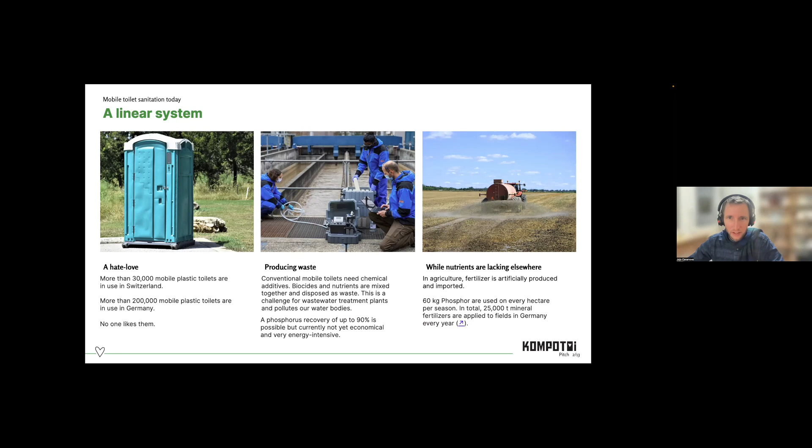The beginning was actually quite hard, I would say we did probably 100,000 failures, as a lot of startups do. We literally took the wood out of a big bin, put together the first cabin, and then we tried it out at the first event. Luckily, the people were too shy to say that's not a good idea.

So they said we should progress. So we did. Next year we did 3 more prototypes, and the next year 10, and then 30, and then 50, and then 100, and then 400. And we run around 1,000 units right now in Switzerland.

What we really recognized quite in the beginning is that what we do is actually a lot, next to building wooden small houses, it is a lot of transportation and service. Switzerland is small, but the word was spread quite fast. So we got calls from 2 or 3 hours away from our headquarters, where people were asking, hey, we would like to rent one of your beautiful toilets, or 2 or 3 or whatever. And it was a huge effort to drive so far.

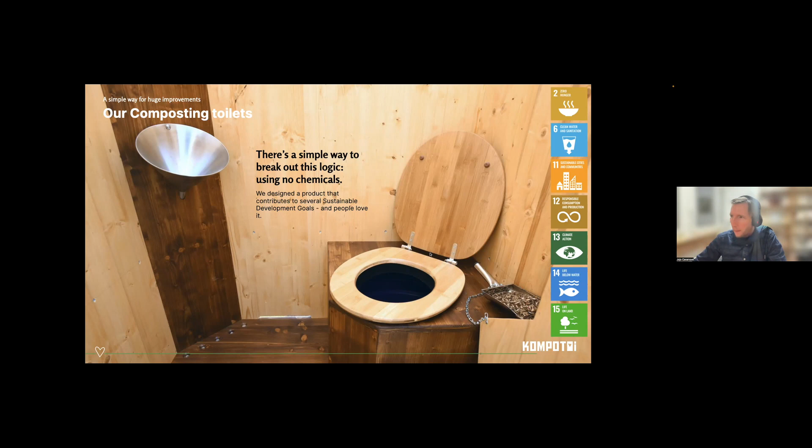And we also have a bit different targeting group than the plastic chemical industry. So what I know, the plastic chemical toilets were invented because construction sites mostly need some solution for the workers. And of course, everyone knows mobile toilets are also used for events and in public and touristic areas.

But we really set the focus on this area so that we don't fight too much with the other companies, and we even want to work together with them because we think we can help them have something new in their portfolio. It's better to work together than against each other.

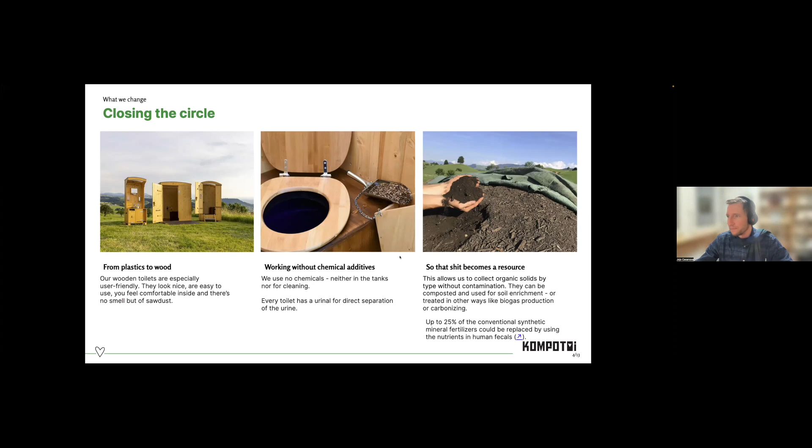So I have here some pictures from our use cases. Of course, we do a lot of events, mostly not huge ones, mostly very small ones. We just got the biggest reservation for next year - it's about 90 toilets, so it's not a big event, but at least for composting toilets, it's quite good to have events like this. But we have much more, like every weekend we have some with 5 toilets there, 2 toilets there, 3 toilets there, and 1 there, and so on.

And for example, the biggest customer from us is the city of Zurich. They have a lot of public places. And in summertime, they are used a lot more than in wintertime. In wintertime, if you have children, of course you go to the playground, but after 10 minutes you're freezing, so you need to go home. You don't need a toilet.

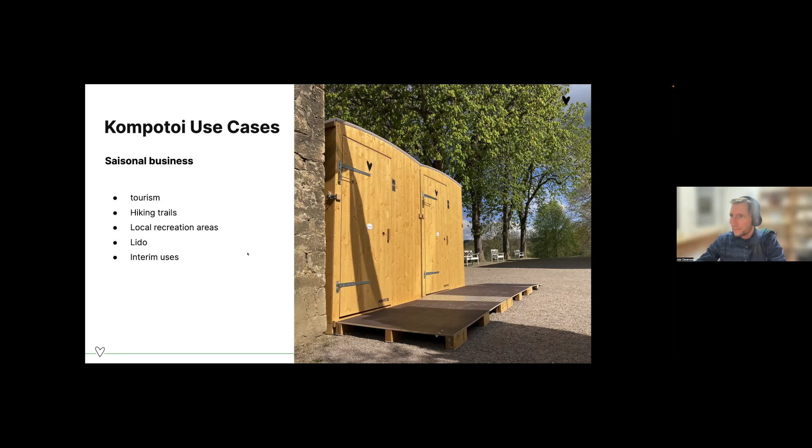So exactly, this is another use case you see here in a public playground.

Of course, we have looked also on the market, and it's really interesting. I mean, even in the small country of Switzerland with 7 million inhabitants, we have 30,000 mobile toilets. And I guess we have a potential of up to 20% of the composting toilets. And if we look at the worldwide market, there is a huge demand for mobile toilets. It has been growing the last 10 years already.

So it's a very interesting market, and we really want to change how this market is looking at the material right now. It should not be trash. It should be looked at as a resource.

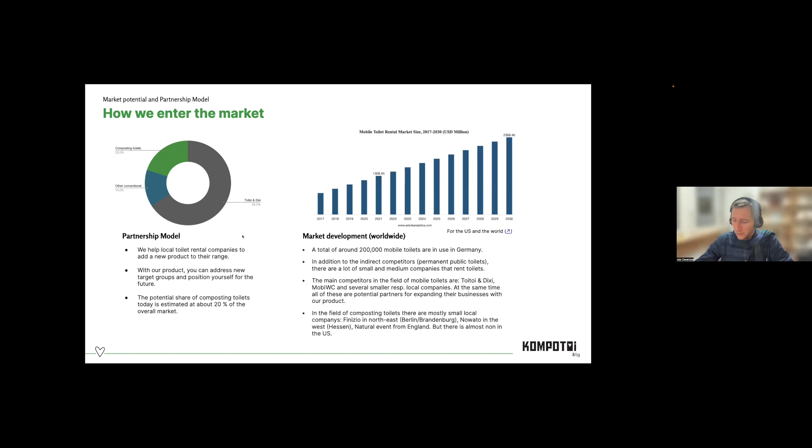Of course, that's not super simple to do. We also have issues with the regulation here in Switzerland. We're, I would say, very happy it's not so strict as it is in the rest of the EU. As I told probably 7 times, Switzerland is very small, so we actually have quite a good relationship with the government, and they also see the necessity, because they have their agenda for 2030 - they should be more circular and so on. So they're really willing to look at it. They don't have so much resources to look at, but we are very happy.

We also founded an association 2.5 years ago, where we did more research and really, how do you say, political work, and that progresses very well. So we have really good tests that show our compost is in a very good condition and safe.

That's very important for them, that we can prove that. I think we've now reached a level where we really can prove that. The same is true in Germany, where there's another association working on the same field, so we can work together, which helps a lot.

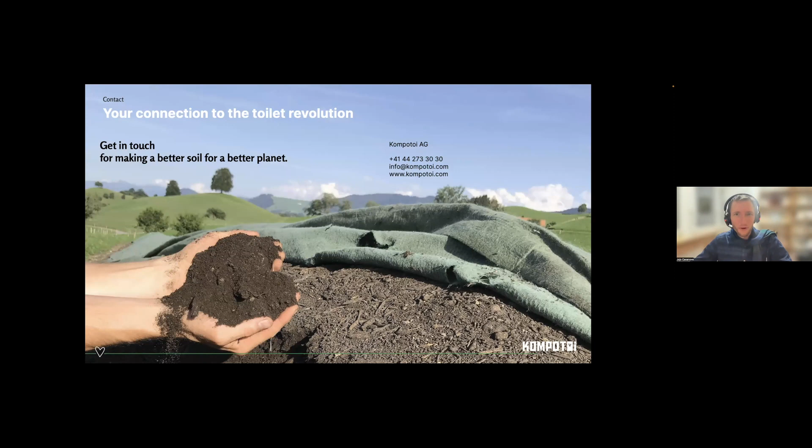So if you're interested to run a porta potty rental company, or know someone who could be interested in it, get in touch with us. Thank you very much, and I'm open for questions later.

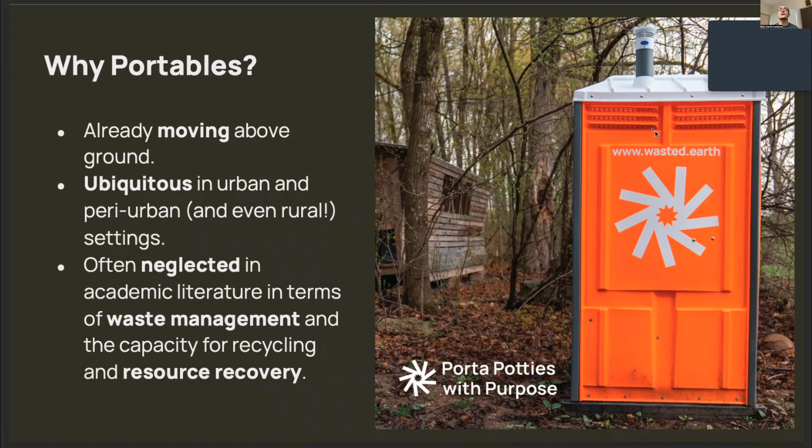That's an opportunity. To explain how it works for us at Wasted, we don't have composting toilets. They're more traditional wet porta potties, where the mixed waste tank is charged with water and an additive to obscure waste and hide smell. About 30% of our fleet has urine diversion as a pilot.

The urine is diverted through a standing urinal into a bladder that's held within the mixed waste tank, so it's out of sight. I'll just note that porta potties are often neglected in academic literature in terms of the potential for resource recovery, and even as basic as general characterization.

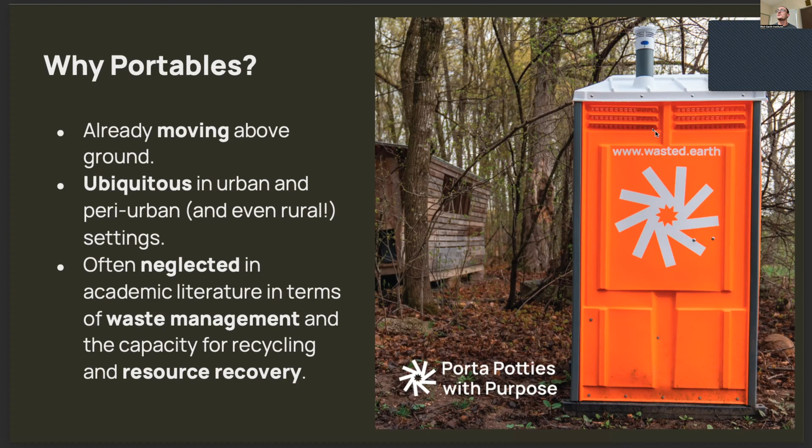So here's one of our toilets on site.

We must know the characteristics of waste to design any sort of treatment and resource recovery. For biological treatment, you need to know the biochemical oxygen demand. We found only one paper that partially describes the characteristics of portable toilet waste, but it lacked information regarding nutrient or elemental concentrations. Some characteristics of interest are measurements of solids, chemical and biochemical oxygen demand, which measure organic material, and then nitrogen, phosphorus, and other elements and nutrients.

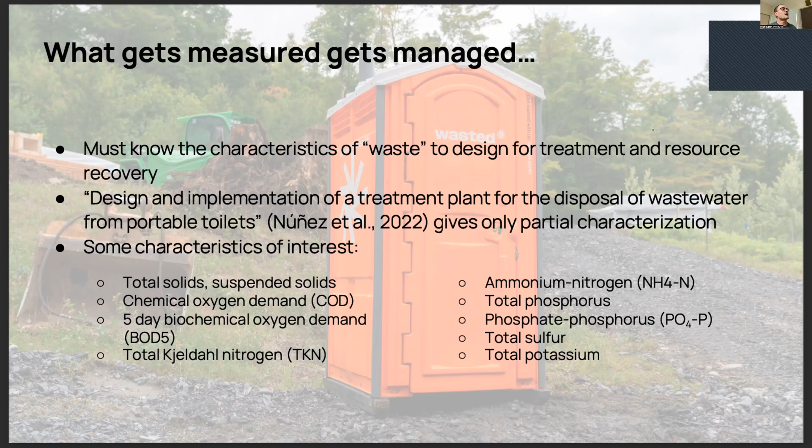Some more toilets on site. Our first approach for characterization was from the ground up, based on existing literature data of the composition of poop and pee and our estimated fill rates of portable toilets.

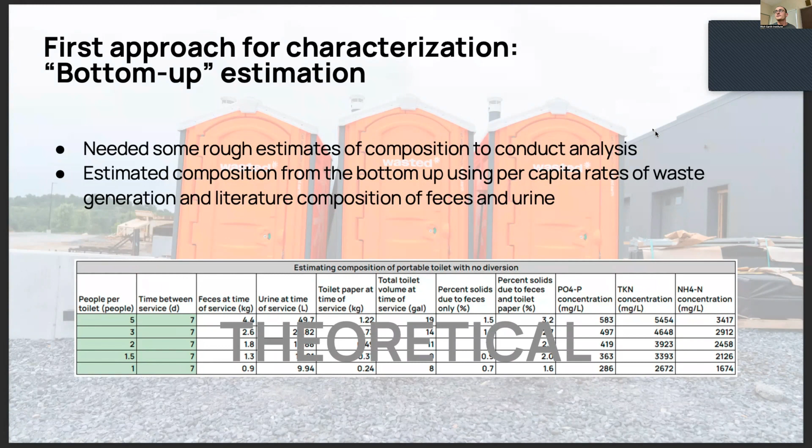This was essentially a spreadsheet exercise, not real lab work. We knew that people produce poop and pee at particular rates, and a toilet fills to about 10 gallons, so we could do a mass balance to get some rough ideas of what is in a portable toilet, because we really had no idea at the start. This was, although pretty rough, a very useful exercise, and I'll describe a bit more why later.

So here I am pouring out homogenized portable toilet waste, which is a polite way of saying blended porta potty smoothies. I'm very glad to be done with that for a while anyway.

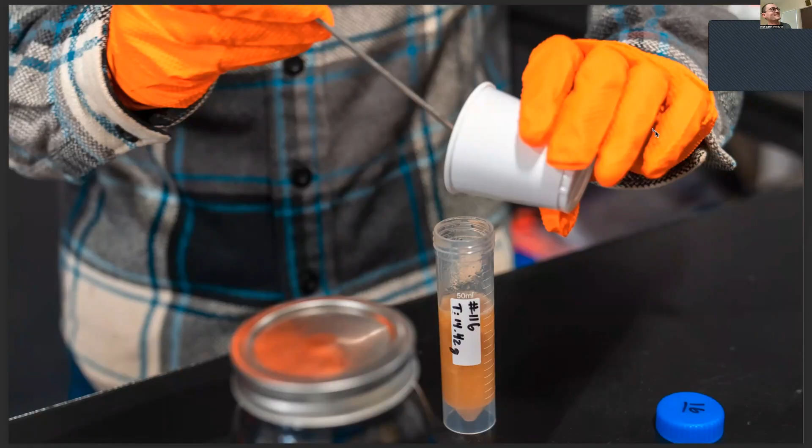Our second approach for characterization was actual physical measurements of portable toilets by different use cases. We needed real data to design treatment for our waste and to meet the unmet analysis that we just couldn't find. So we physically sampled and analyzed toilet data from three different use cases.

Those were long-term urine diverting toilets that were used throughout the workday, similarly long-term toilets without urine diversion, and short-term event toilets for things like concerts and parties, again without diversion.

For each use case, we built a composite of 5 different toilet samples, stirring the tank to mix the waste as best we could, sampling, pooling, and homogenizing. We sampled much more material than we needed because we did not know if we could get the analysis right the first time around. We also conducted sampling in triplicate because we expected sampling to be a non-trivial aspect of this analysis. Porta potties have a range of textures and consistencies — there's liquids and solids — so we wanted to make sure we were consistent and representative in how we made these measurements.

Here we have our pump truck, one of our pump trucks, on the right. You can't tell from the outside, but the tank is split into 3 parts: one for source separated urine, one part for mixed waste, and one part for processed water. That pickup ahead of us is a farm partner's urine applicator with some tubing low to the ground to reduce losses there and prevent burning leaves.

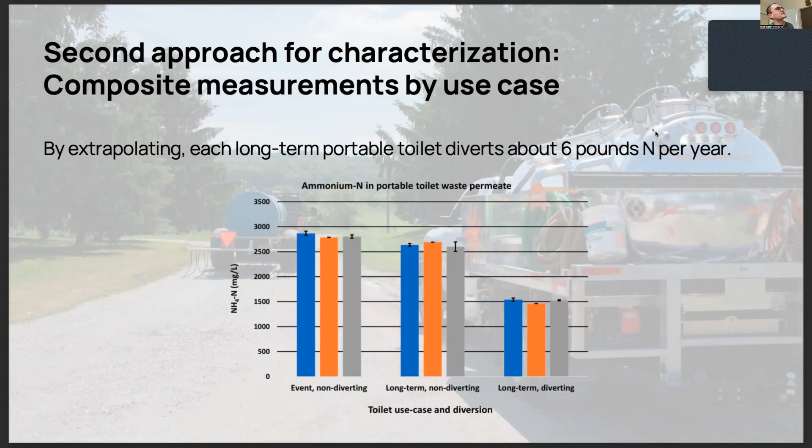We just got this in this morning. We sampled, in addition to toilets by use case, which was going to be helpful for us to see how our characteristics might change if we were to do more event toilets or more long-term, we also sampled our whole truck. This is the first full wastewater characterization of portable toilets in the US and the most full characterization to date. So pretty excited about this. Yeah.

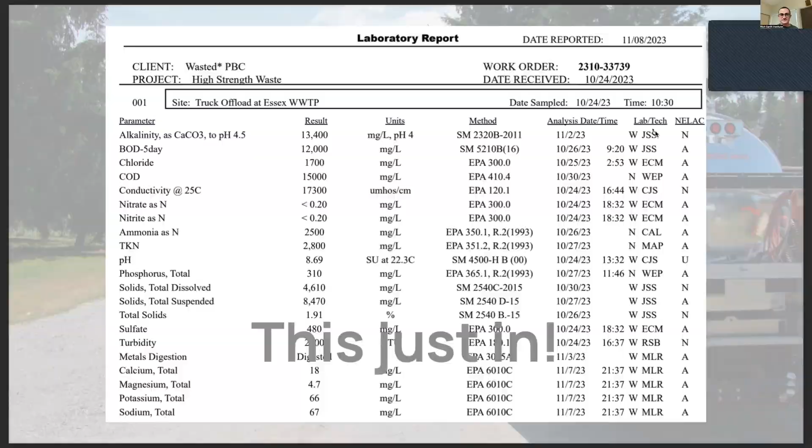Some more porta potty smoothies. And that relates to this.

I've spoken to nutrients and water, but another piece of this puzzle is carbon in terms of emissions and energy potential. So you can think of a porta potty tank as the first step in treatment in a biological reactor, whether we like it or not, because the bacteria are going to be churning away. And since a porta potty is not aerated, we can expect biological activity to be dominantly anaerobic and methane generating.

It's reported that 87% of on-site methane emissions are generated during containment, as waste sits in a tank. Now, if we could stop bacteria from working, we might reduce on-site emissions and preserve that energy value for captured biogas production later in treatment.

But we're not sure we want to do that. The traditional practice, even to this day for porta potty operators, is to use a biocide that kills bacteria in the toilet tank. It reduces smell, but it's not amenable to the wastewater treatment plant where waste ends up, and it's not something we want to put in the environment.

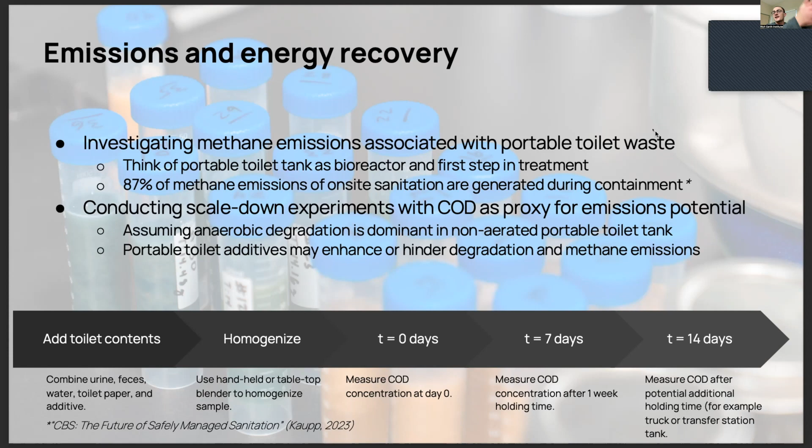So we don't use a biocide, but we're exploring biocide as a control along with a biostatic and some other natural additives to see how additives affect emissions potential. In that experiment, we're using chemical oxygen demand and the difference in chemical oxygen demand for different time points as a proxy for emissions potential.

Here we have a solar farm at one of our farm partners where sheep graze between the panels. We've applied urine there, and sheep get to eat the grass fertilized by urine. I think that's a great picture.

In conclusion, portable toilets have the potential for the recovery of nutrients, water, and energy. In terms of nutrients, since we began collecting urine in April, we've processed about 1,400 gallons of urine for application with the farm partner. We're exploring treatment for the recovery of water, and we're exploring the impact of portable toilet additives on methane emissions and the potential for energy recovery.

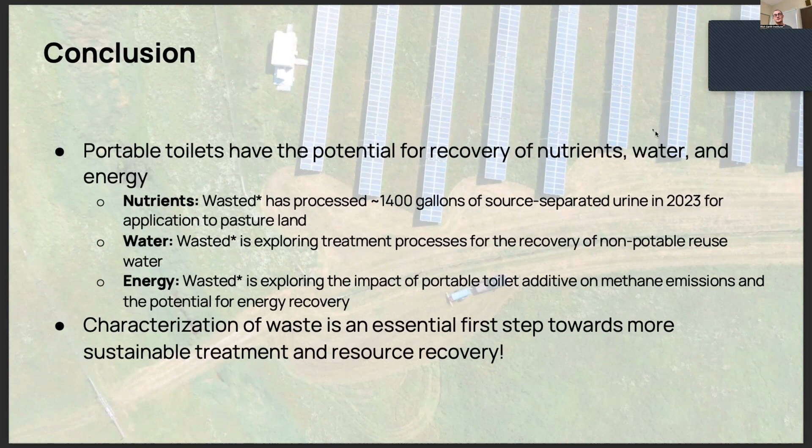Characterization is a first step towards more sustainable treatment and resource recovery. I'd like to thank Rich Earth for hosting us, our partners at Georgia Institute of Technology for analytical support, and thank you all for your time.

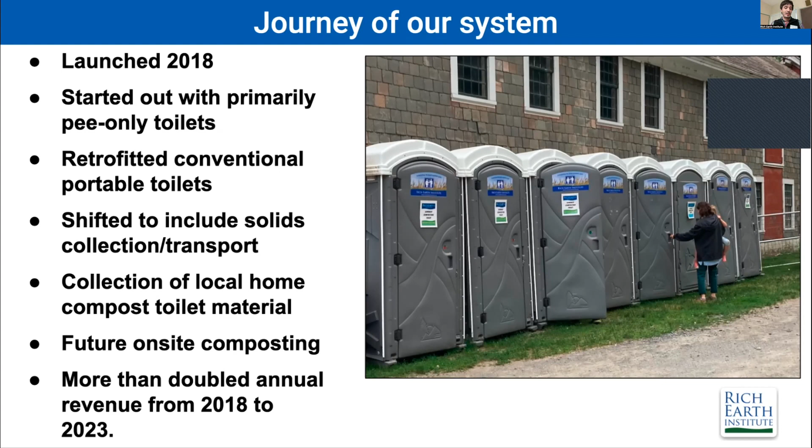We are looking towards doing future on-site composting ourselves. Currently, we are trucking that material off to a treatment plant that does biosolids composting, but it is getting mixed with the treatment plant sludge that's getting composted. In the time between 2018 and 2023, it's been a really successful business venture and revenue generator for our organization, which has been a great benefit as well.

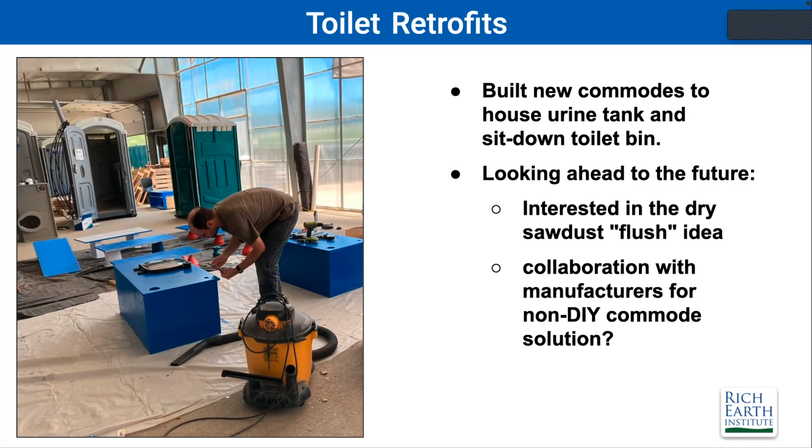So the retrofitting process: we build new commodes. We take the old tanks out, or now we just buy the toilets as shells. We build new commodes out of painted plywood, and house in them a urine tank for the urinal and a bin with sawdust for the sit-down toilet. In the future, we're very interested in the dry flush thing that Karsten with Finizio was demonstrating yesterday, and also interested in potential collaboration for a non-DIY commode solution with industry partners, but that's probably a little ways in the future.

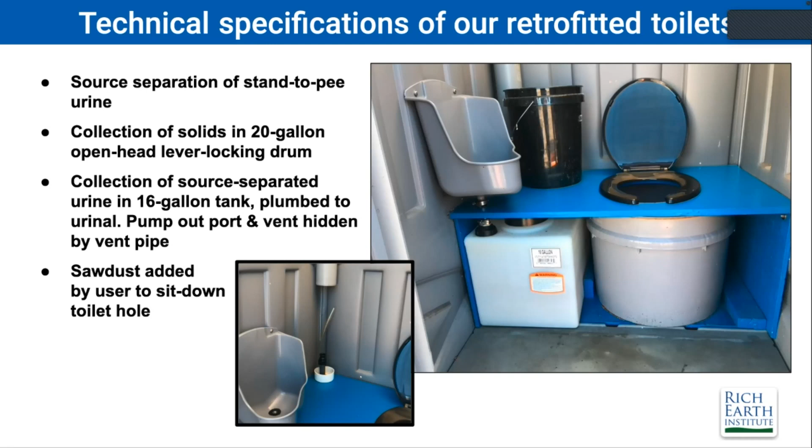So when you peel back the facade of our toilets, this is what they look like. On the picture on the right, you can see the urine tank underneath the urinal, as well as the bin underneath the sit-down toilet. The black bucket there is full of sawdust for people to add to the sit-down toilet when they're done. On the bottom picture, you can see our pump-out mechanism for the urine tank. For the solids container, we just pull that container right out and cap it. It's got a locking lid, so it contains the waste very well as we are going.

So this is what you see when you walk in. We've gotten very great benefit and feedback from users. There's obviously no splashback issue because your waste is hitting a dry sawdust pile. There's no chemical smell. Previously deposited waste is hopefully buried in sawdust if other people have done their job, which is mostly the case. And the waste is going to be recycled, and I think people really enjoy that.

There is the user challenge that because it's not a liquid in there, it doesn't distribute evenly, so there is some amount of mountain building that can happen. Many people, at least in the US, sometimes have some pushback to any kind of behavior change. Thus far, we have found that adding sawdust is not too onerous, but it is a little bit of a change that people need to do.

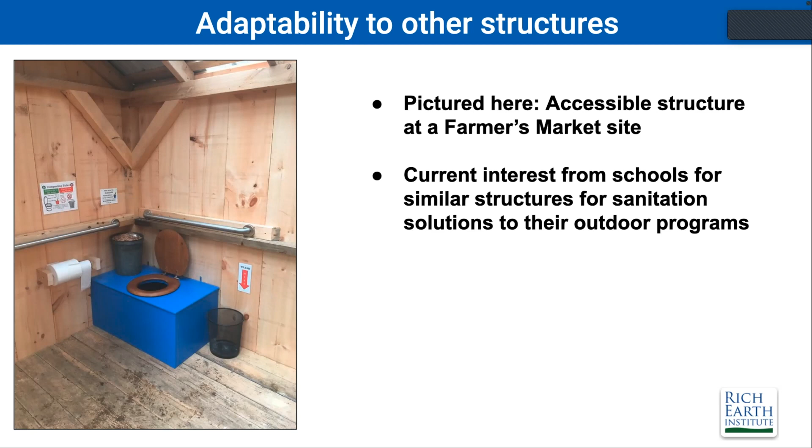We've also been able to deploy this same system into other structures. This is an accessible, ADA-accessible structure that we built for a local farmers market. We are currently working, in the planning stage, with a number of schools as well as outdoor programs. There's been a big boom since the pandemic in this area of outdoor programs in schools, which means they have a lot of outdoor sanitation needs that they never had before. So that's been really exciting, and we're working through the planning stages of what that's going to look like. But this basic system with this bin has felt like it is quite adaptable to a number of situations.

So operations benefits: this system allows approximately half of the liquid to be pumped right out of the toilet, reducing the weight of the solids bin, because we are handling those solids bins by hand or on a hand truck.

User error is fairly rare. I would say the biggest user error that happens is putting sawdust into the urinal, which isn't a huge deal but is kind of annoying for us operators. And then the lever locking bins provide really strong and secure containment for waste during transport, which is an upgrade from our previous containment.

Challenges by doing it with a sawdust bin based container system, unlike the Wasted system, there is a lot more manual labor.

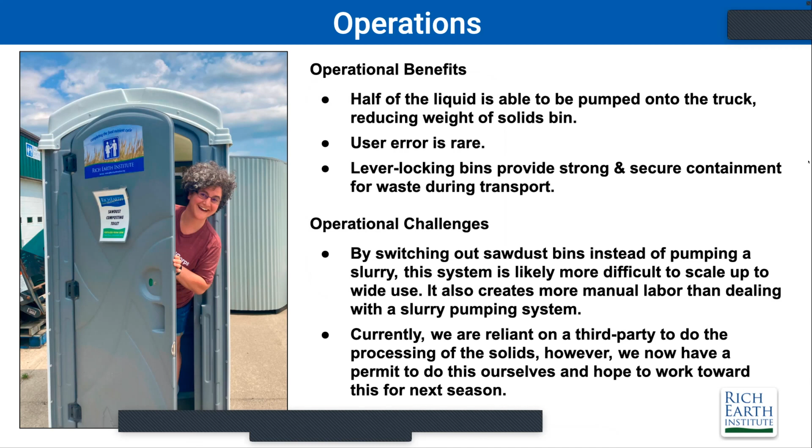Lastly, it's really exciting to hear about things like Jojo's program in Switzerland. Fabian was just telling me that in France there are more than a dozen companies doing this with resource recovery portable toilets, with Wasted now doing this on a bigger scale.

I think from our perspective, coming from the nonprofit world, the portable toilet business for us provides a great education and outreach platform for our mission, in addition to recycling human waste for beneficial reuse and providing revenue. It also opens our programs to dealing with full toilet waste, both in terms of portable toilets and helping locals who have composting toilets at their homes. But we don't have the same for-profit structure, so a lot of the back end parts of our process are supported by our ongoing nonprofit programs.

We don't have that kind of need to have it be funding everything, so we sit in a little bit of a different place than a lot of these other companies that are getting started. But hopefully some of the technical ideas we've been putting into practice can be useful for other people starting these kinds of programs in other places. So thank you so much.

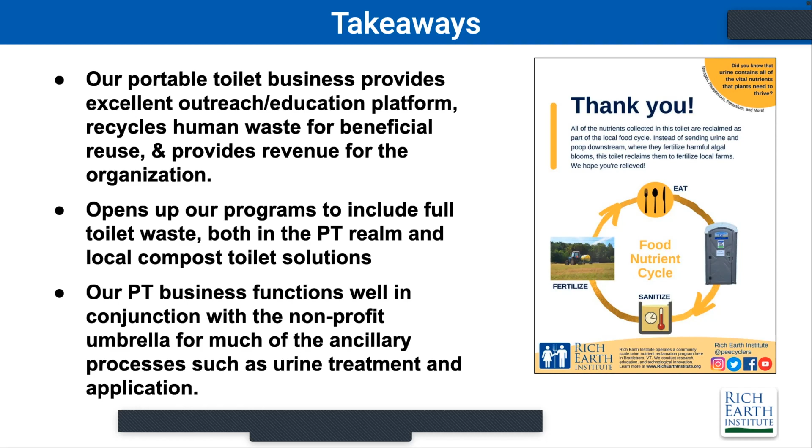Benson, come back. Is the diversion from the urinal, or do you also have a diverting seat? And I love that you have a split truck for the urine collection. That was just a celebration, not a question.

Right now we just have urine diversion in urinals. It works out pretty well for us because our long-term rentals are largely construction companies, which happen to be largely people with anatomy that are amenable to urinals that are up and standing on the wall.

Don't go anywhere, okay, another question for you. How were you funded initially? Seems like a major operation. I think Abby can speak a bit better to that.

Hey, I'm the Chief Technology Officer at Wasted, and we have been funded by venture capital. So we've raised a little over 7 million in venture capital funding to fund our operation.